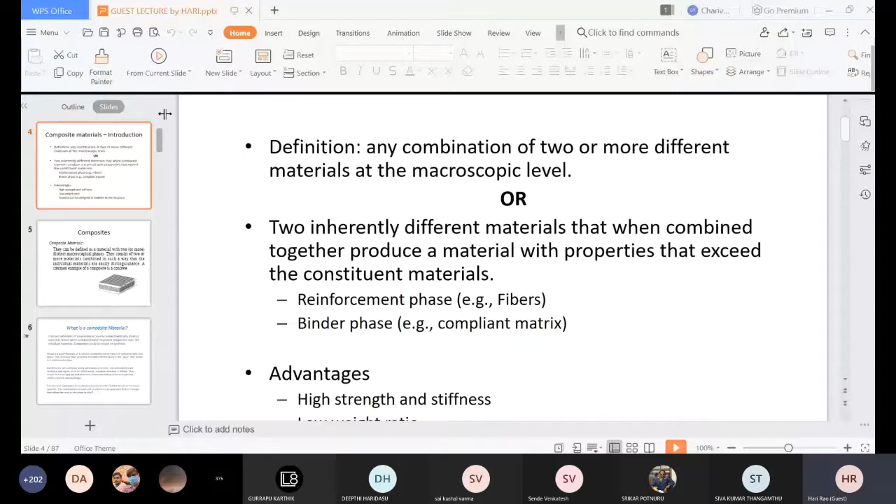Sure. Okay, I will give the introduction of composite materials. Engineering applications often require an unusual combination of properties, especially in aerospace applications, where we need strong, stiff, lightweight materials. This definitely gives better weight solutions for use in aerospace applications.

Generally, there are two types of composite materials that are used: one is carbon epoxy and the other is carbon phenolic. I will explain this further in the next slide.

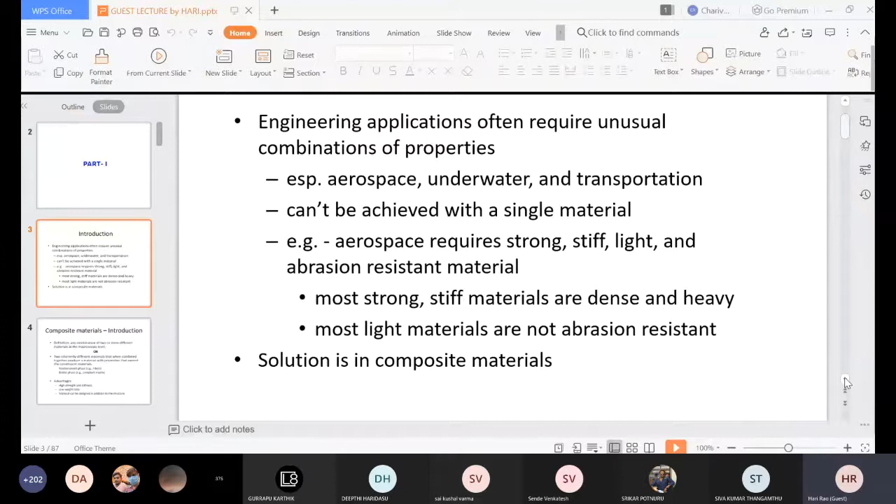The definition of composite materials is any combination of 2 or more different materials that can be seen at a macroscopic level, and it exceeds the properties of the constituent materials. Meaning, the combination of 2 materials gives better properties, and that is called a composite material. These materials provide high strength and stiffness with low weight, and can be used in aerospace applications.

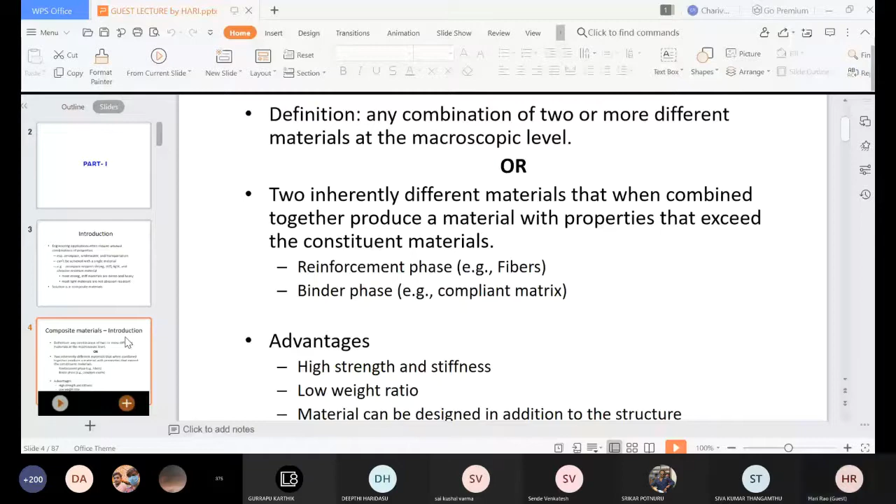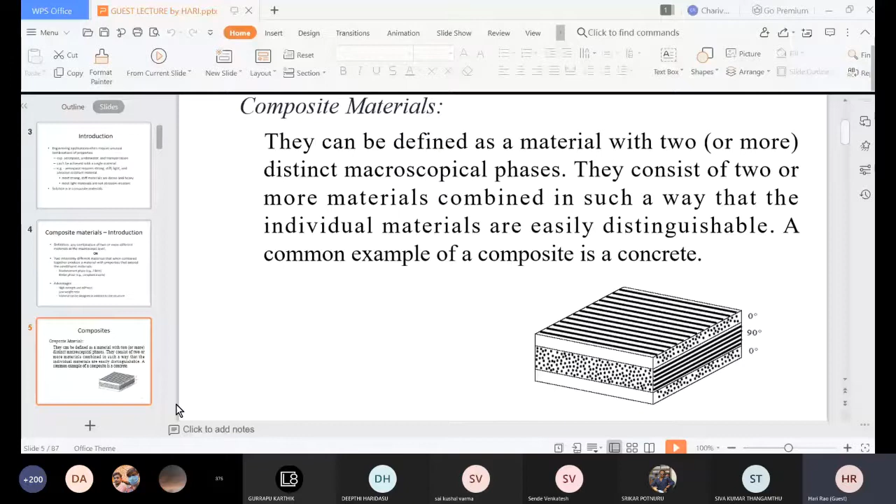Composite materials can be defined as materials with 2 distinct macroscopic phases. They consist of 2 or more materials combined in such a way that the individual materials are easily distinguishable. The best example is concrete. Another example is wood, which is a natural composite available in nature, being a combination of cellulose fiber and lignin. Bamboo is also one of the best composite materials.

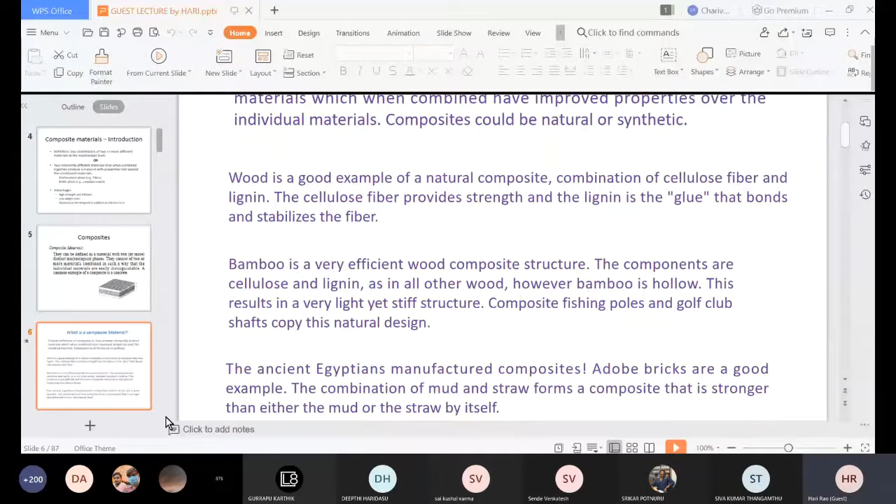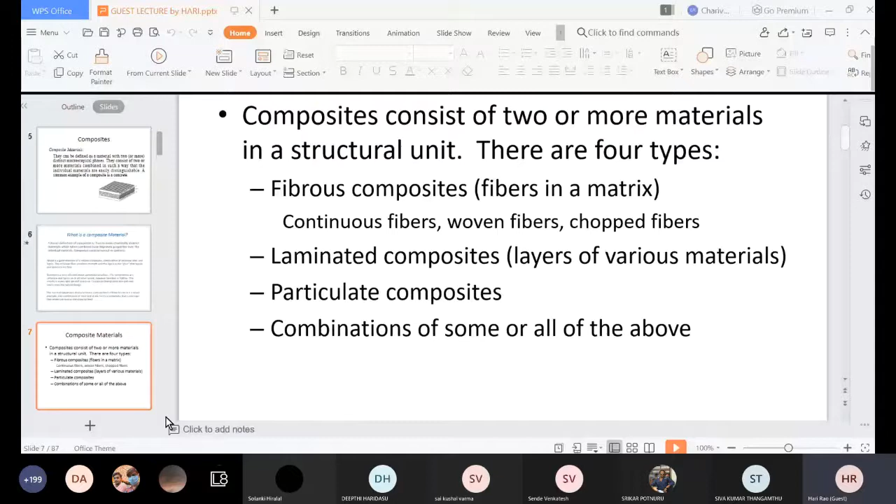Composite structures are manufactured as a combination of fibers in a matrix, laminated composites, particulates, and a combination of all of the above, to make structural units. These are the 5 basic types of composite materials: fiber composite, particulate composite, laminar composites, flakes, and filled composites.

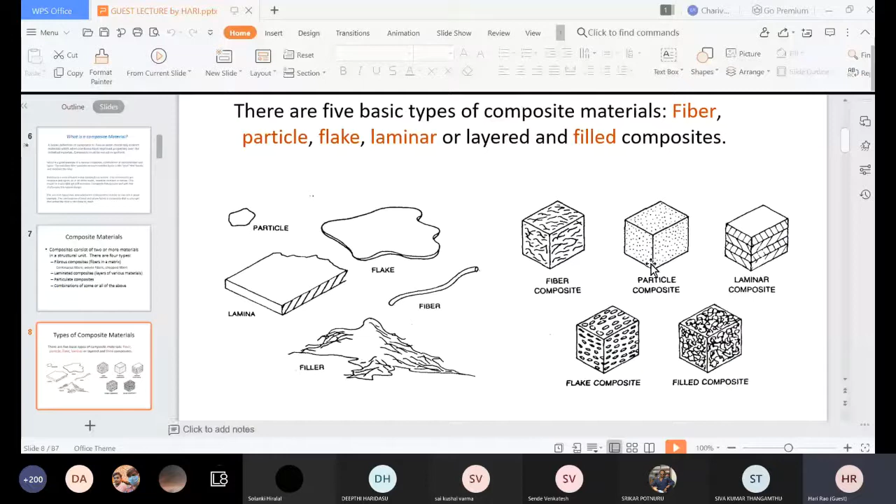The matrix phase and the reinforcement phase are defined as metal matrices, metal composites, ceramic composites, and polymer composites. These are the definitions given, and generally we use this type of composite in general applications. Now, classification of the composites...